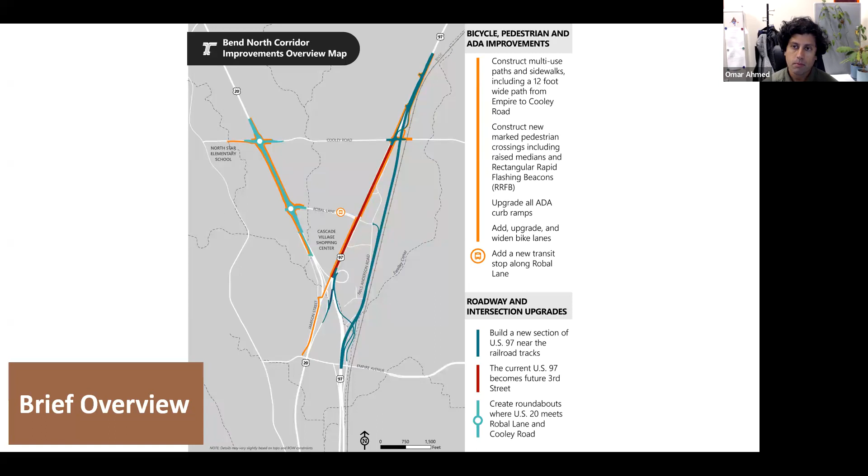I wanted to highlight some of our bike ped scope on this project specifically. Over on the 20 side and on the existing 97 side, you're going to see 10 to 12 foot paths pretty much throughout the corridor to ensure our bicycle and pedestrian users have good access. The roundabouts on US 20 have RRFBs, rectangular rapid flashing beacons, for pedestrian crossing safety.

We've also got a new bus stop location for CET on Robal. The number 4 line has already changed direction, I believe - it's now operating in a counterclockwise way, giving them more travel time reliability and a safer route for drivers. We've got more path on existing 97 and a quiet crossing at Cooley and the railroad.

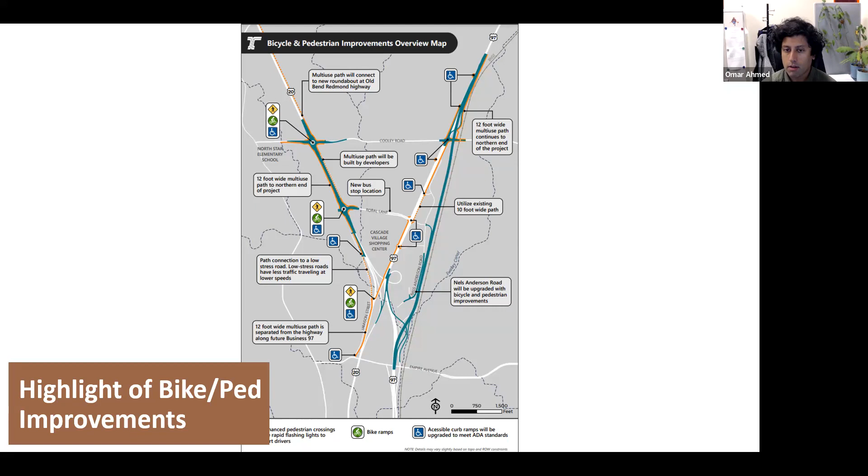So with that, I'm going to pass it over to Zach to talk about our schedule and construction. And before I forget, if anyone has questions at all, please feel free to interrupt us - neither of us are too concerned about that, and if it's a relevant topic and slide, it's always a good time to ask.

Thanks, Omar. So this is a block map for our project that I'll be referring to as I go through the presentation. I'm going to primarily present our traffic control configuration over the next 6 months, plus give a sneak peek into the future beyond that. As Omar mentioned, if there are any questions, feel free to jump in and interrupt me, and I'll address that as we go.

To quickly provide some orientation, unfortunately throughout this presentation north is going to be bouncing all over the place, so I'll try to remember to orient as we go through each slide. North on this slide is to the right of the screen. US 20 is the various shades of blue and green, includes the Cooley and Robal roundabout and preservation work, paving work associated with that.

Looking at the new US 97 alignment, when I say south end or south interchange, I'm referring to the US 97 at Empire Avenue area. For the north end or north interchange, I'm referring to new US 97 and Cooley Road. And if I say mid alignment, I'm referring to the new US 97 alignment between those two points, which roughly parallels Nels Anderson.

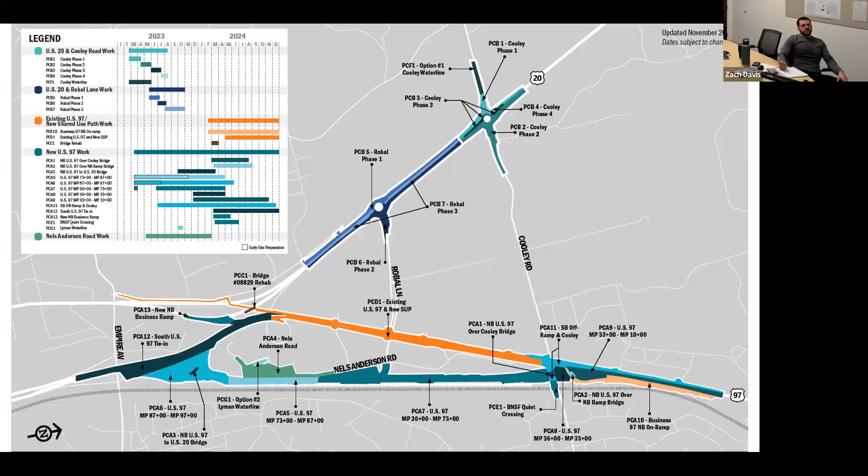So first, starting at US 20, as of November 2023, US 20 is functionally complete and fully operational. The contractor is out there now working on final trimming and cleanup punch list work. You may see some very minor traffic control associated with this work. There also is probably going to be some striping adjustments done at the end of next year. But for the most part, there will not be any major traffic control measures associated with the Bend North Corridor project in this area.

Outside of that, the only outstanding element on the US 20 work is a variable message sign that's going to be installed between the Cooley and Old Bend Redmond roundabouts, for eastbound traffic. You'll see that come up over the next year. We've poured the foundation and we still need to bring the sign in and work through some electrical items.

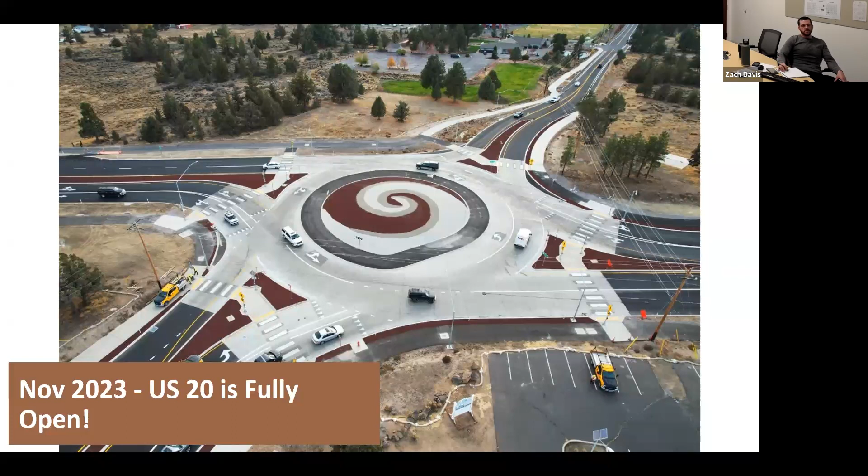Moving now back over to US 97, the north end, we are in a traffic control configuration which is stage 2. We entered into that configuration in November, and we are planning to be in that configuration until April 2024.

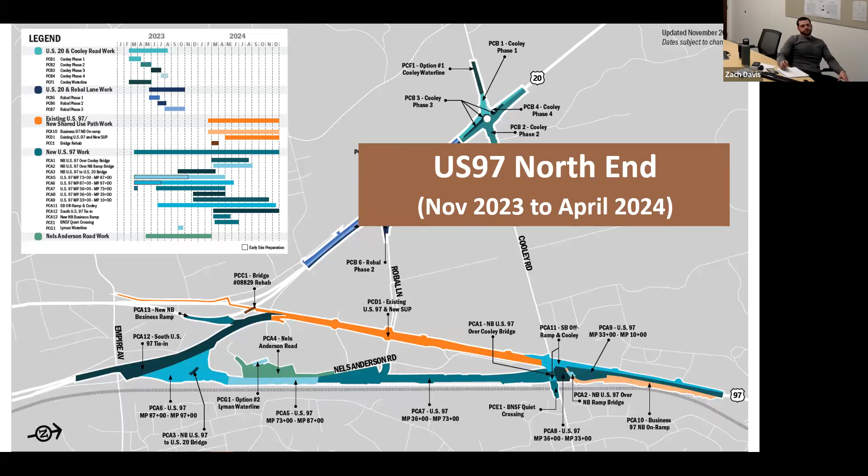This is the stage 2 lane configuration looking southbound. In order to give the contractor room to build the north interchange connection and shared use path, we basically had to push all the travel lanes together and move them as far west as possible. That's what you see here. We have 2 travel lanes each direction, 11 feet wide, with a 5-foot shoulder for northbound and a 5-foot shoulder for southbound. There is an area where we've had to reduce down to 4.5 feet - there just wasn't enough real estate there. So that's the lane configuration.

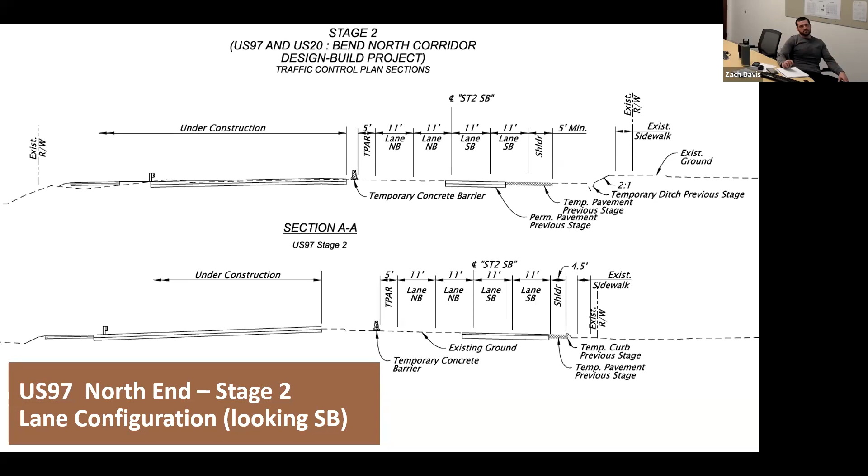I'll walk you through the plan view on the next slide. Starting on the very north end of the project - the north arrow, if it were on here, would be pointing to the left of the screen.

I'll walk through this traffic control stage going southbound. So the southbound travel lanes are going from left to right. And as you can see, at roughly station 3128, that's where we begin our traffic switch and lane narrowing.

There's concrete barrier on the northbound shoulder, and the Grandview access is right in, right out only. The northbound left turning movement on Grandview has been permanently closed - it's closed in this temporary traffic control configuration, but it won't be coming back once we finish permanent construction. Right now our closure for that is surface mounted tubular markers, but the permanent configuration will be a harder barrier.

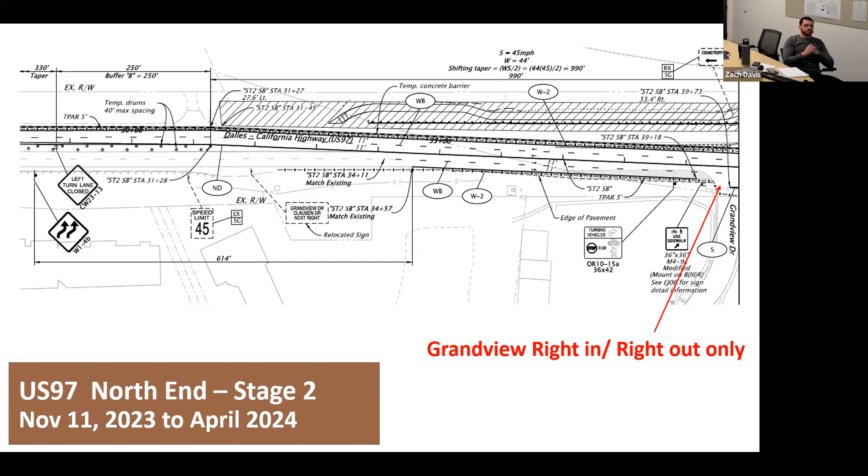This is just an aerial view of our current traffic control configuration - I want to say this aerial is 2 weeks old. You can see this is looking northbound, and there's the concrete barrier on the northbound shoulder. You can see where we've milled out existing US 97, meaning we've removed the asphalt pavement - it's actually stockpiled there behind the barrier. And Grandview is a right in, right out.

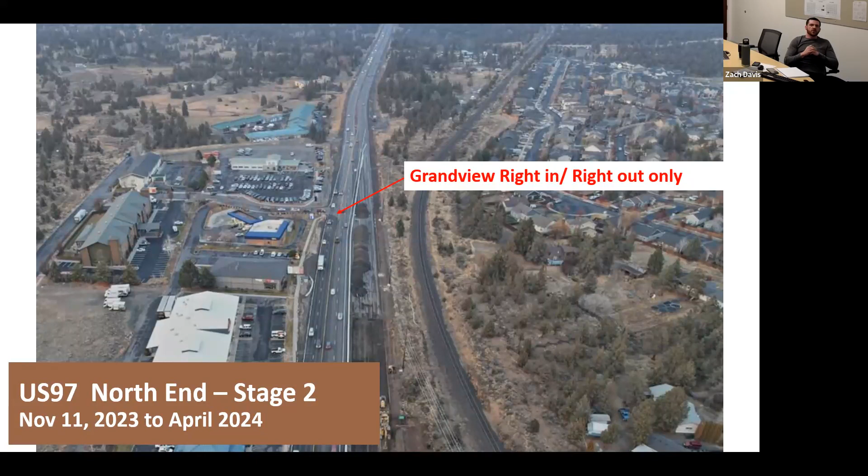Moving on south from Grandview, this is the alignment as we go through. Again, 2 11-foot travel lanes each direction, 5-foot shoulder on the northbound shoulder. The southbound shoulder is a little variable. Clausen remains right in, right out only, and that left turning movement is blocked with surface mounted tubular markers.

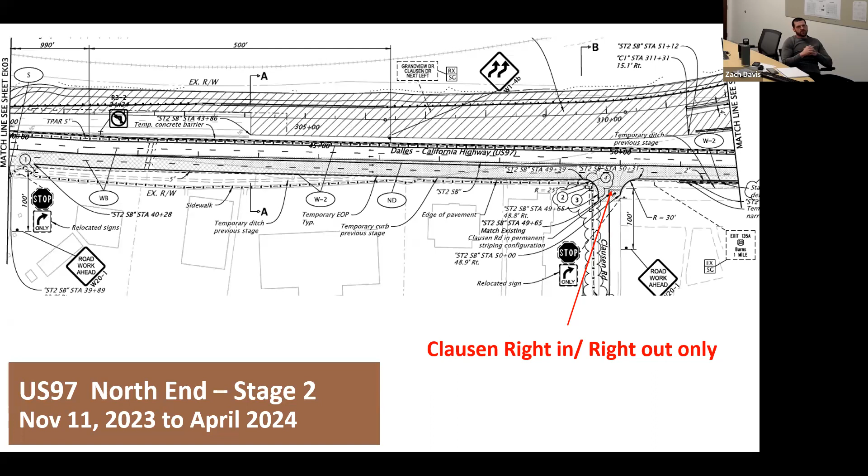And again, an aerial just showing that same configuration coming on down. There's the barrier, and Clausen is right in, right out.

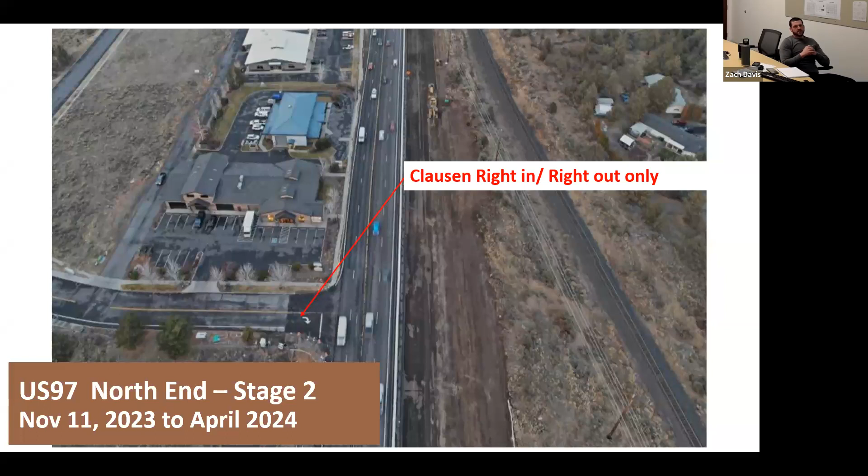Moving on down to Cooley, we had to gray this out because it's so busy, it's kind of confusing. But anyway, we have traffic shifted all the way to the west still. There's a temporary signal at Cooley - we've shifted the heads over, and it's operating generally in its existing configuration the way it did before. We didn't drop any lanes or anything. We did remove some turning pockets and some islands, and we had to shrink the footprint again to provide room.

We have heard back from members of the public, our own maintenance staff, and our construction administration team that there are some areas for improvement out here. So we're looking at how we can increase delineation through the winter months during rain events. We've got a number of different measures we're looking to implement - reflective pavement markers being one, and some rumble strips. We've heard delineation can be better, and we're working on that, including at the signal, which we're also evaluating. I would anticipate some additional measures being out in the field here in the next week or two. We're also working very closely with our maintenance staff to monitor for weather events, and we have certain protocols in place to make sure we keep this segment of the highway clear, specifically where we've got concrete barrier and there's the potential for a berm to build up.

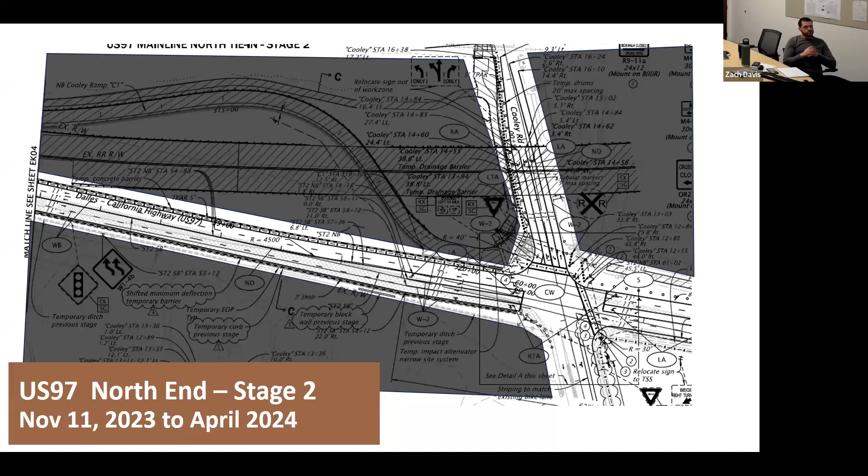There's going to be some traffic control measures implemented, with the intent being to improve the delineation and guidance through this section of the work zone. Any questions on the north end before I move on?

Real quick, there's one more aerial just showing the Cooley Road intersection. You can see this is now looking south. There's a large embankment that we're building south of Cooley Road, and we'll be building a large embankment to the north of Cooley Road shortly.

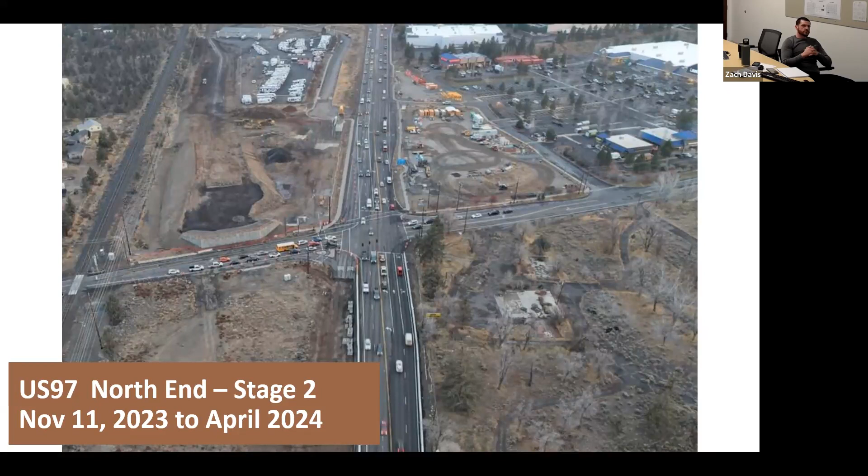Any questions on the north end traffic control before I move on? Okay, next slide. This just summarizes the north end.

The existing traffic alignment before we got into this stage was two 12-foot travel lanes each way with a raised concrete median that provided a hard barrier to protect against left turns and crossovers. In order to provide room to actually build this work, we had to take that away in a temporary configuration and reduce travel lanes down to 11 foot.

We are anticipating being in this specific configuration until April 2024. Regarding left turn closures, Clausen was never a left turn, we never added one, so there's no left turn at Clausen going northbound. But we did remove the left turn going into Grandview for safety reasons.

Here's the detour route. We do have message boards out there intended to guide folks to this detour route.

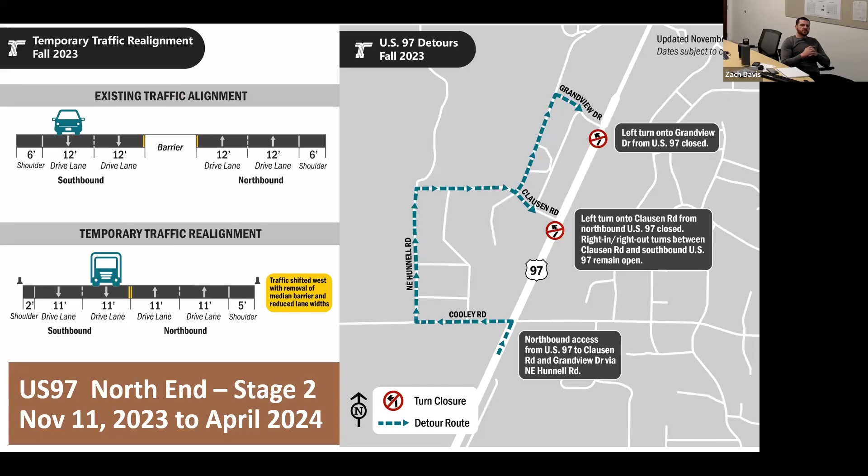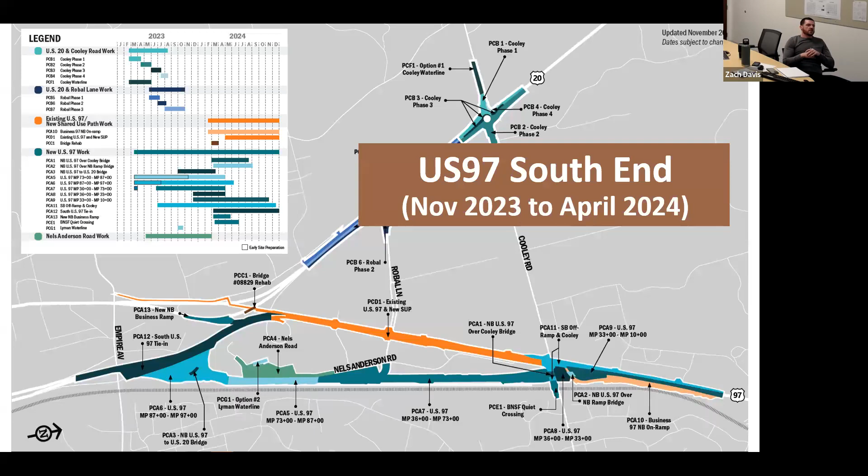Next slide. Now moving on to US 97 South End, which again is the Empire Avenue area of the project. Next slide. On the south end, we are actually in stage 3.

Stage 3 includes a traffic shift to provide the contractor work room underneath the Empire Avenue bridge so they can build a new retaining wall and construct the new 97 connection to existing.

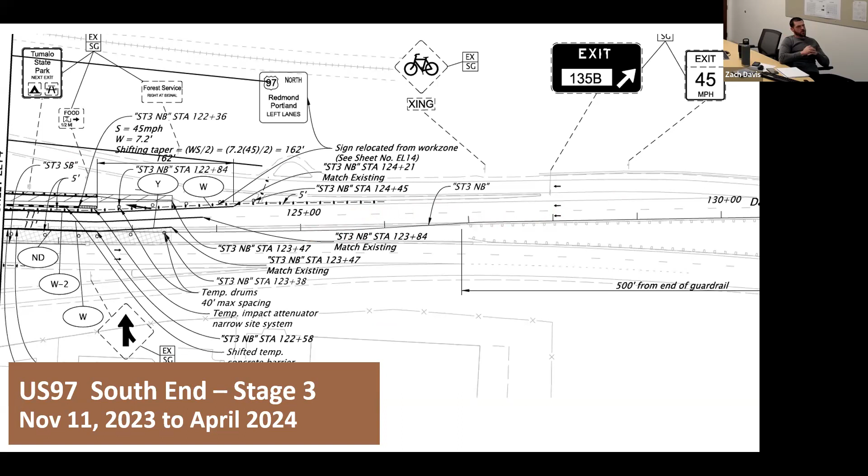We're actually doing some vibration monitoring right now to set a baseline, and then we're going to get into some rock hammering in this area and building the majority of the new US 97 connection.

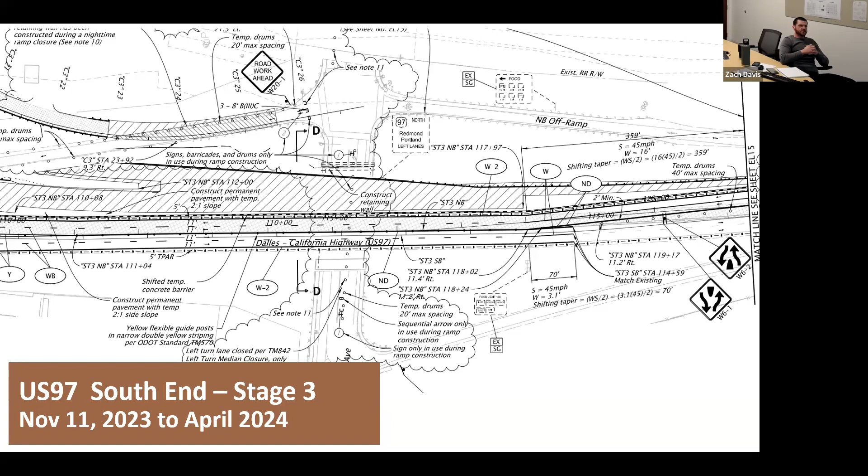To the east of that, in the hatched area, we're building all new US 97. We're building what we call the flyover structure for the new Empire on-ramp, and working through this new area.

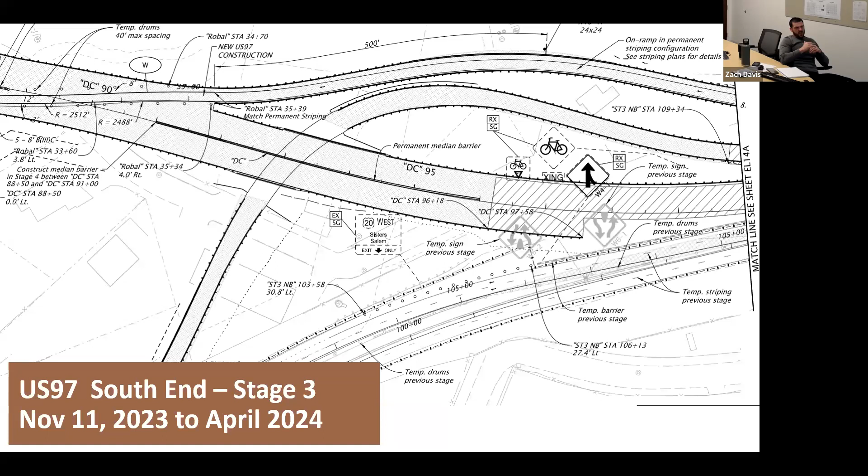We're anticipating being in this traffic control configuration until about April 2024. Next slide, and this again is just an aerial kind of showing all of the work.

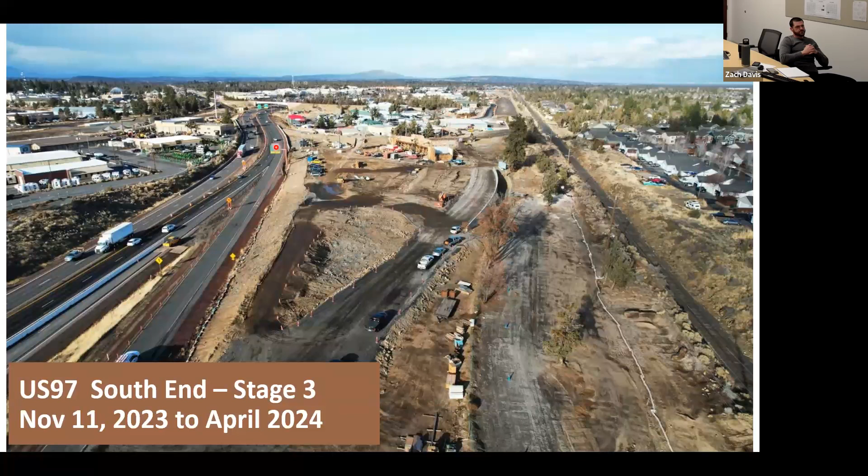Next slide. Okay, looking a little ahead, past mid-spring of 2024, I'm going to focus on the 97 north end alignment. The south end, we have some fluid traffic control plans, so I didn't want to present them yet. Next slide.

On the north end, we're actually going to implement a separation between the northbound and southbound lanes. We're anticipating this to occur April to early summer 2024.

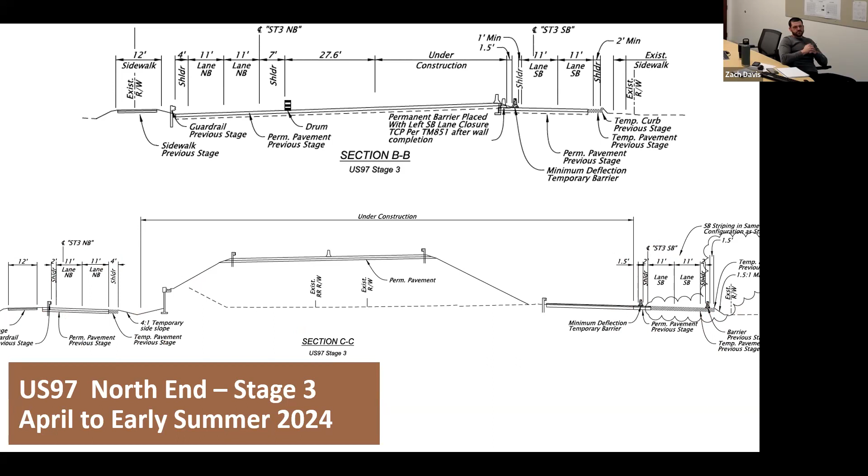Go, next slide. Actually, it's going to be two slides down the road. So, north is to the left.

This is the very north end of the project, and I'll walk you through going southbound. The traffic configuration southbound will remain as it is today, and northbound is going to be shifted up onto new US 97 and new features of new US 97.

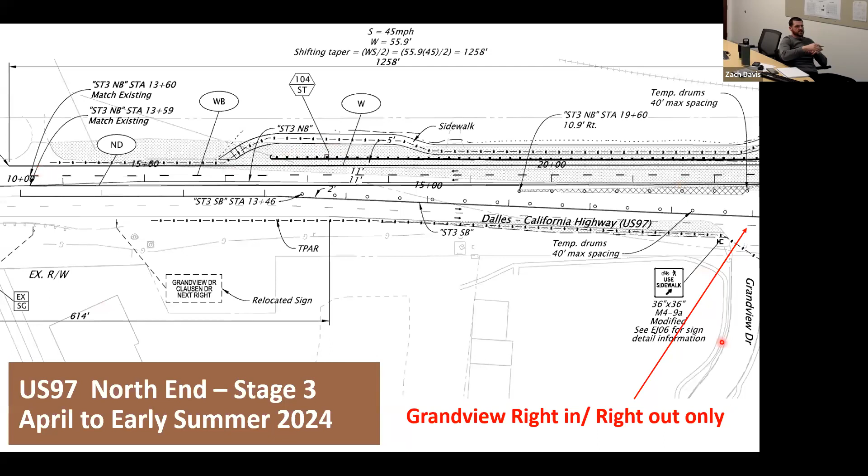Next slide. Continuing on through, northbound travel lanes are on a portion of the new US 97.

We also have the shared use path that will be constructed and implemented on the very top side of this slide. That will be our new T-PAR route, which we'll use to channelize pedestrian and bicycle traffic through this area. Again, southbound travel lanes remain in their configuration as they are today, with concrete barriers separating the work from the travel lanes.

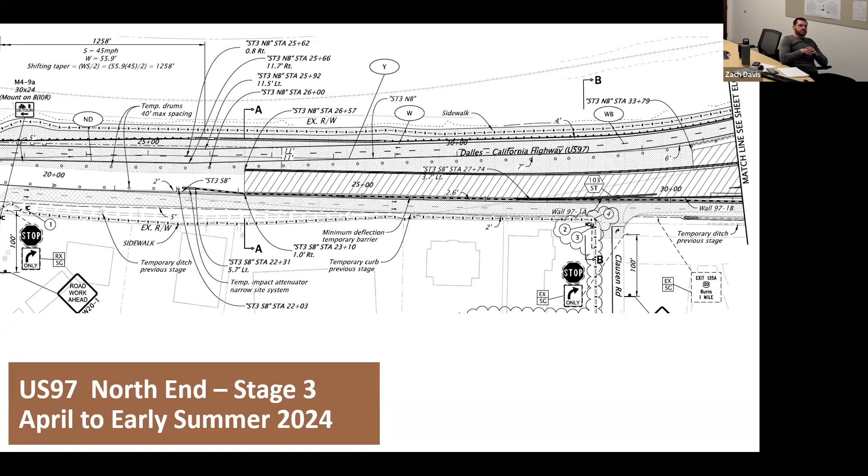That's going to require going all the way down to subgrade and building back up, which is going to trigger 24-hour impacts of some kind. We need to do that work, but we're not entirely sure how it's going to be conducted yet. We're working through a variety of different traffic control concepts with the city of Bend. The primary objective is to minimize the impact of traffic control in that area, recognizing that it's a vital linkage to the area. So there's a directional lane closure concept we're looking at, and some other concepts as well.

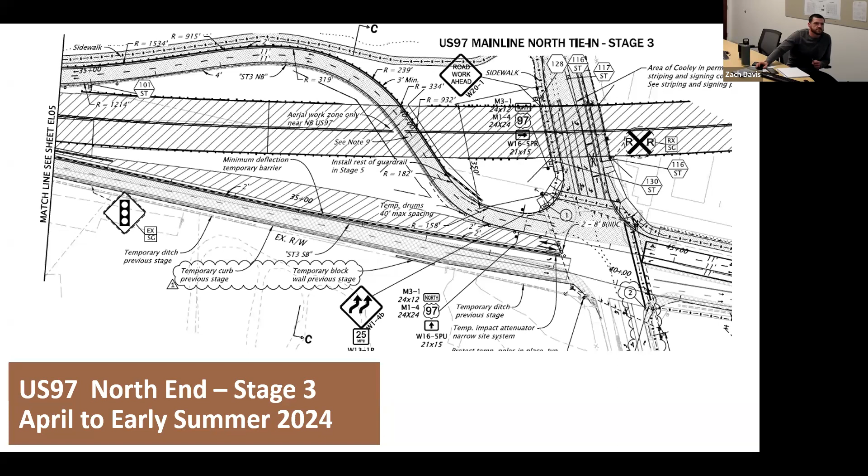Balancing all these factors and working with the city of Bend, we're developing a construction concept for Cooley Road that rebuilds the road but minimizes the duration, is done in an appropriate season so we don't have risks such as inclement weather delaying the work, and avoids performing that work at night because it's very close to a residential area. That's all I got.

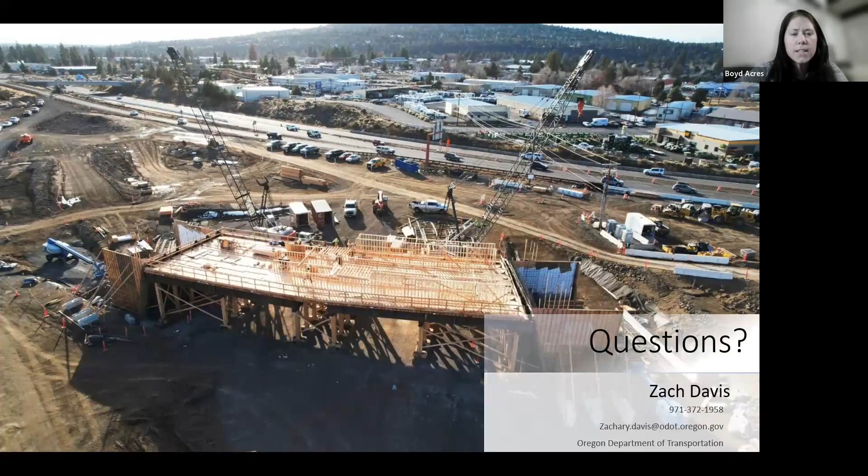I have a quick question. I don't think I saw you talk about it. The southbound on-ramp from Empire, is anything happening with that? Is there going to be a stoplight installed? I know that's a real problem area already. I didn't know if that was part of this plan.

Sorry, you said southbound on-ramp from Empire? Oh right, yeah, so that's a really tough knot to untangle, as you might imagine, between probably intersection controls here and then also at 20 and Empire. That's technically on the books as a separate project, an Empire interchange improvement project, but it's currently not funded by the ODOT side of things. I believe the city at one point or another had some go bond funding for that, but as it sits today, it's not a fully funded project, or really one that we've done a lot of preliminary concept work on.

Okay, but yeah, absolutely, duly noted that that's a hazard. It's a tough intersection. As someone who has walked through there before, it's not fun either. No, definitely not, it's hard to drive. It's like near impossible to walk past. Right, so yeah, we definitely understand something needs to be done. We just don't have funding for a project for it just yet.

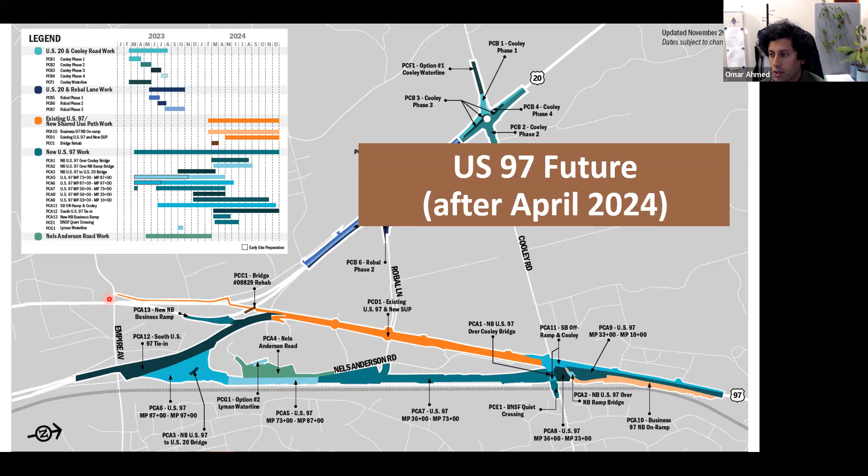Okay, that was my only question, but if anyone else has questions, feel free to raise your hand and I can unmute you. All right, I don't think I see any. Nobody else has questions? Okay.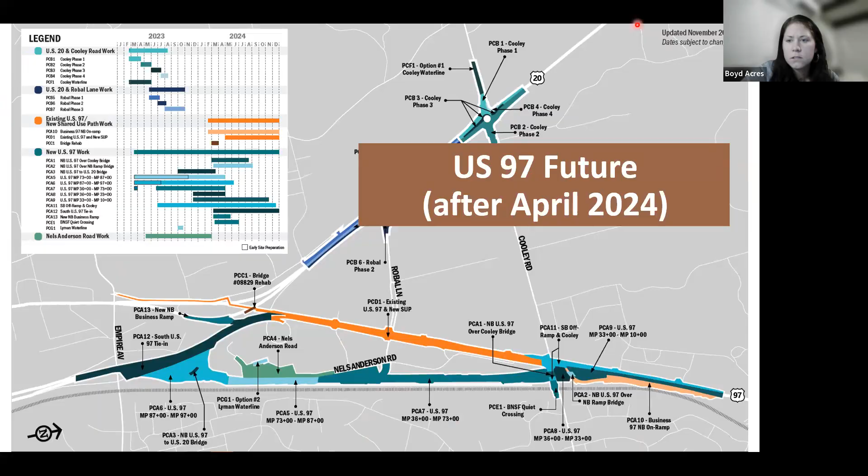Well, thank you guys so much for that presentation and update. I can tell that people are interested since there's so many on the call. We don't usually have this many people at our meetings. So yeah, thank you so much for that presentation. You're welcome to stick around if you'd like. We're just going to talk about some other Boyd Acres news and discussion.

So anybody on the call is welcome to stay, but I'm hoping a couple of the board members, we have some things to discuss. I see Adam and Diane is still here. So first I wanted to, I see that, is Joette on the call still? Oh, she is, good. So Joette has been helping the Boyd Acres neighborhood in one way or another for over 10 years, putting in so much time volunteering to us and helping support us long before I was here. But she's going to be stepping back from her duties. So I just really wanted to put that out there and thank her so much for everything that she has done and continues to do.

With that said, we will be looking for someone to help with our email update, our email newsletter, and our website updating. It doesn't have to be a board member. So if anybody is interested and knows someone that might be interested, that would be great.

We do have a cookie decorating event happening on December 18th. That's going to be at Deschutes Junction at 5 o'clock, so I hope to see you guys there. Let me see if there's anything else. Do either of the other board members have anything they want to talk about? Oh, I can unmute you if you do. Okay, I think that's pretty much it.